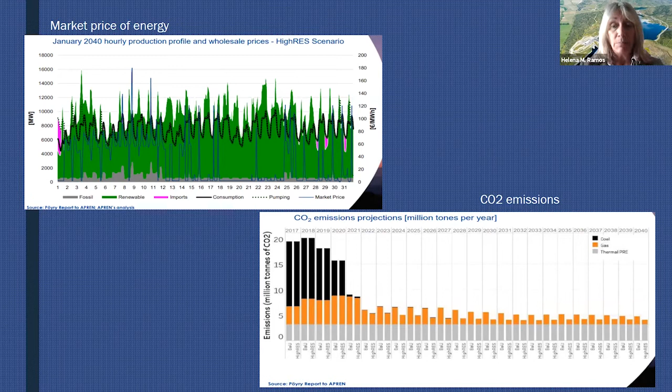Well, a significant effort is required to reduce carbon emissions generated by industrial processes and land use by 2050. Additionally, if the climate objective of the Paris Agreement was raised to restrict global temperature rise to 1.5 Celsius degrees, this would require significant additional emission reductions and a steeper decline in global emissions.

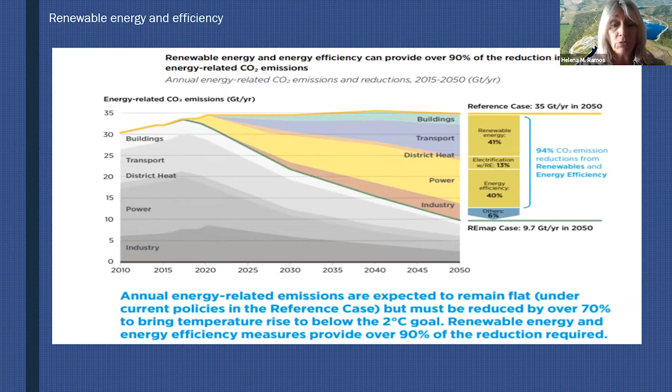Well, we can see the energy-related CO2 emissions here, a reduction of around 90% by renewables and energy efficiency that will be necessary by around 2050.

Well, the rising importance of solar and wind energy in the power sector is very interesting. To deliver the energy transition, the almost complete decarbonization of the electricity sector by 2050 is required. How can we do this? By using renewables, increasing energy efficiency, and making power systems more flexible.

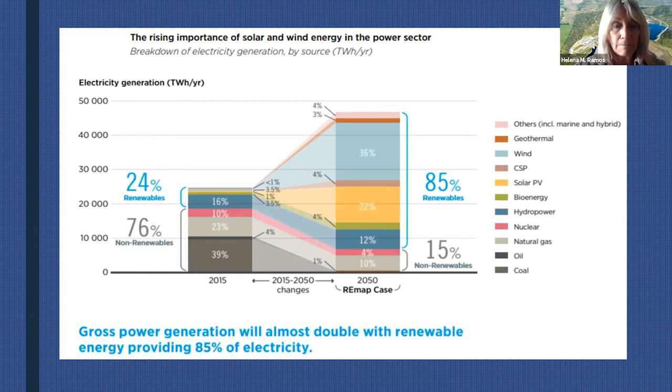Well, there is a relationship between energy consumption and production from renewable sources. The relationship between the energy source and the selling price of electricity also exists in terms of costs. This means the greater the representativeness of renewable energy sources, the lower the market price is.

We can observe these green bars, which mean renewable energy production. When we have more production from renewables, the market price decreases and decays like this.

Well, so a very interesting solution appears based on pumped hydro systems. So the challenge is focused on using renewable sources, such as wind and solar power, with their variability, intermittency, unpredictability, and dependence on the weather, together with solutions supported by hydropower.

You can see in this figure pump storage energy solutions, okay, in which the storage can be 8 hours or more, depending on the water volume that we can retain in these two reservoirs. And we can integrate, we can also absorb these intermittent energies like solar and wind energy.

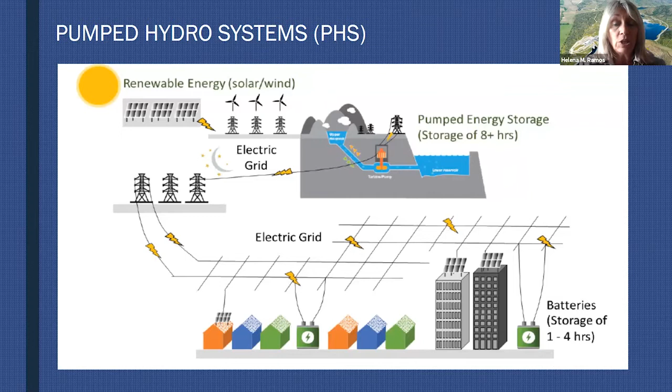Compare this with the other types of batteries that you can see at the bottom of this figure, in which the storage is only about 1 to 4 hours.

Well, in many European countries, the phase out of nuclear and coal generation has started with the transition to new renewable sources, comprising mainly solar and wind for electricity generation. However, they are variable energy sources and difficult to align with the demand. So hydropower has already an important role today and will become even more important in the next decades, since hydropower can be a catalyst for the energy transition.

Then, hydropower will be one of the most crucial pillars of the future electric systems, required for the full integration of renewables and the grid regulation, thanks to its high quality of flexibility and storage. Hydropower already supports the integration of wind and solar energy. Nowadays, we can see different systems like this into the supply grid through flexibility in generation, as well as its

potential for storage capacity. This service will be in much greater demand to achieve the energy transition in Europe and worldwide. This will require a more flexible, efficient, environmentally and socially acceptable approach to the increasing hydropower production to complement wind and solar energy production. So the ambitious plan for the energy transition in Europe seeks to achieve a low carbon climate resilient future safely and cost effectively, serving as a worldwide example.

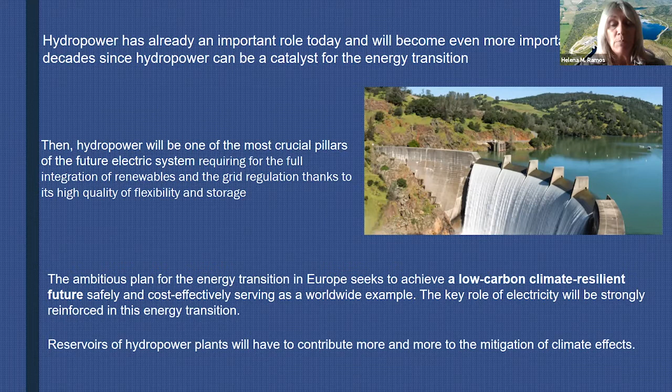The key role of electricity will be strongly reinforced in this energy transition. For example, reservoirs of hydropower plants will have to contribute more and more to the mitigation also of the climate effects as a natural battery without waste, without so many environmental impacts compared with the other types of batteries. Europe has long-term experience with hydropower design, construction, operation, and maintenance. The know-how of the European industry, comprising manufacturing, engineering, and consulting, is strongly recognized worldwide.

Hydropower is the most preferable source of energy, or at least a powerful and efficient vector for global decarbonization. Hydropower is a climate-friendly technology, with the lowest release of CO2 and mitigating with water storage the impact of global warming and climate change. Hydropower is well suited to support the power network with flexibility and storage. It increases new renewable energy penetration, as I mentioned before, with a potential role in energy transition and will result in opportunities for new developments, especially for small hydropower, medium, and up to the large ones.

Hydropower increases the storage capacity both in short and long terms. The investment in hydropower will be considered as a safe value in the long term. Well, the International Energy Agency recognizes the critical role of renewable and flexible hydropower in helping countries to meet their climate and sustainable development goals.

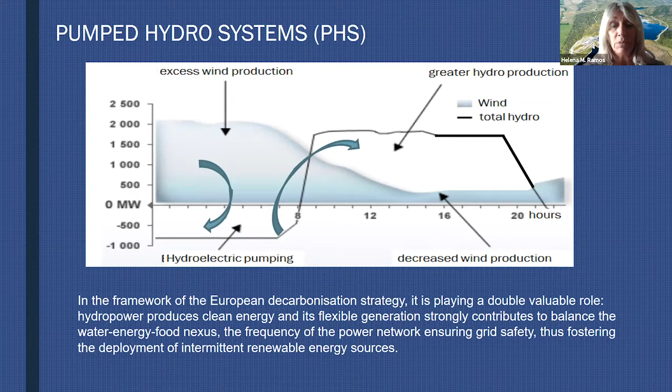So it is possible to guarantee we can uniform this load chart, power supply to the grid with several advantages. In the framework of the European decarbonization strategy, it is playing a double valuable role. Hydropower produces clean energy, and its flexible generation strongly contributes to balance the water, energy, and food nexus, the frequency of the power network ensuring grid safety, thus fostering the deployment of intermittent renewable energy sources.

Well, here, looking at the renewable energy technologies, they offer opportunities to address trade-offs and leverage synergies between sectors to enhance the water and energy nexus. However, connecting renewable power plants directly to the grid can cause dynamic controlling problems if the electricity network is not prepared for handling such variations due to the intermittency of renewable sources availability. It can cause some problems, but there is a solution for this.

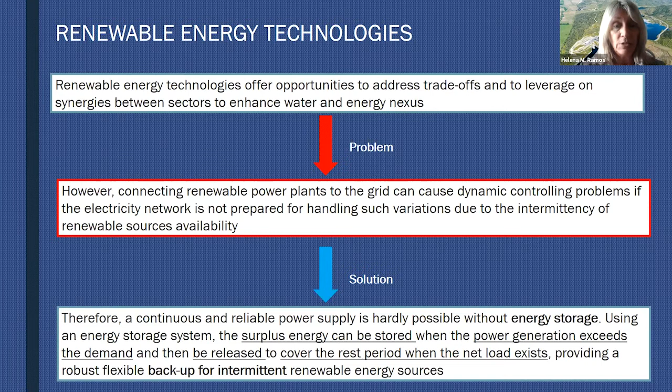A continuous and reliable power supply is hardly possible without energy storage. Using an energy storage system, the surplus energy can be stored when the power generation exceeds the demand, and then released to cover the rest period when the net load exists, providing a robust, flexible backup for intermittent renewable energy sources. And we can get a solution using a pumped hydropower storage, energy storage solution.

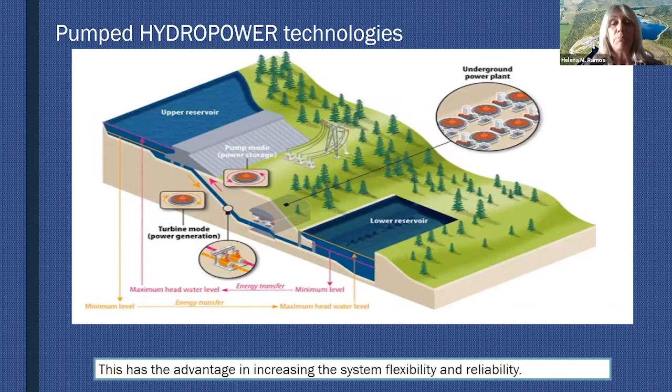Here we can see there is an advantage in increasing the system flexibility and reliability, decreasing the variability of renewable sources, since the variable power output can be leveled out due to a complementary nature between renewable sources through their integration in the hydropower by a pumped storage solution in a circular economy of water source. We can use the same volume of water between a lower and an upper reservoir as presented in this scheme, and using this same water, we are not wasting water. We can apply here the circular economy too.

Portugal increased in pump storage hydropower systems from 5 gigawatt to 7 gigawatt by 2020. Other examples of upgrade projects, for example, Alqueva 2, Bemposta 2, and Venda Nova 3, created this type of solutions based on the pump storage solutions. Portugal and Norway lead in Europe as the countries that invest more in hydropower and solutions with pump storage.

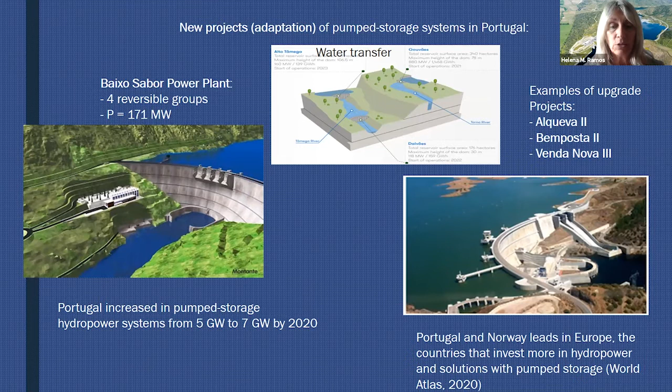And it is possible to make use of the connection to the already installed electrical network with higher efficiency, because water serves as a cooling system for the photovoltaic panels, increasing their total efficiency. There is more sunlight when there is less rain, and vice versa, in an excellent complementarity, as we can apply also for wind.

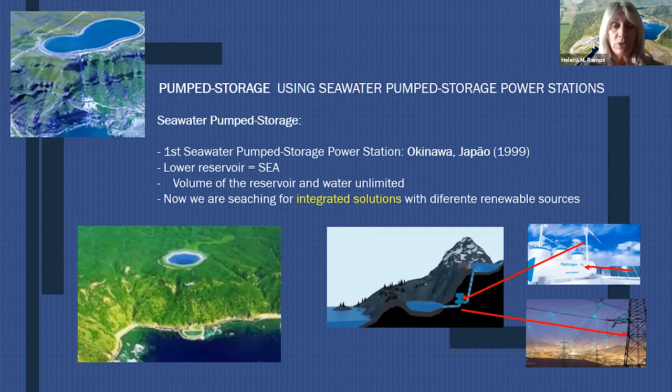Well, renewable energies are a subject of particular relevance in developed and developing countries. How to store these energies? Well, we need a good and competitive option to store energy generated by intermittent sources. Without storage, the energy produced, if it is not used, is wasted.

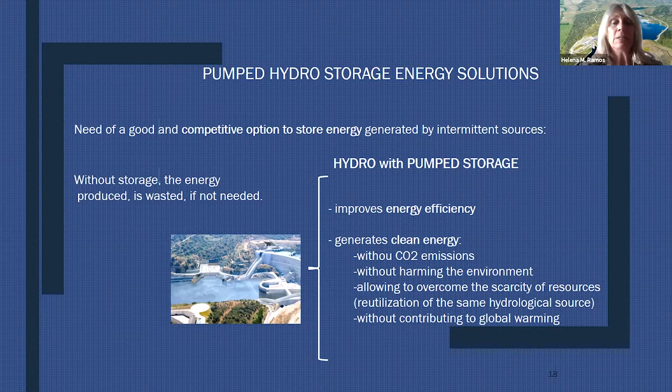Using hydro complemented with pump storage can improve the energy efficiency of the whole system and can generate clean energy without significant CO2 emissions, of course, without harming the environment, allowing to overcome the scarcity of resources with the reutilization of the same hydrologic source, this is water, without contributing to global warming.

Let's see a real case study. This is a case study developed in Madeira Island. This is one island belonging to Portugal. This is the multi-purpose Socorridos system. Initially, it was only a hydropower solution. Initial configuration based only on hydropower.

You can see we have here the power station equipped with Pelton turbines, and we have long hydro tunnels and canals allowing the transfer of water collected from the higher altitude and more pluvious northern sides of the island to the southern side of the island.

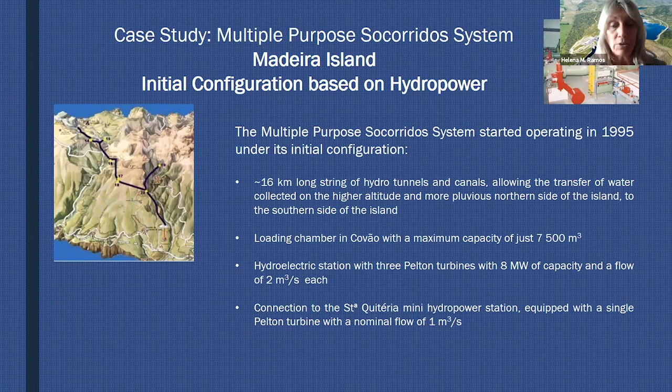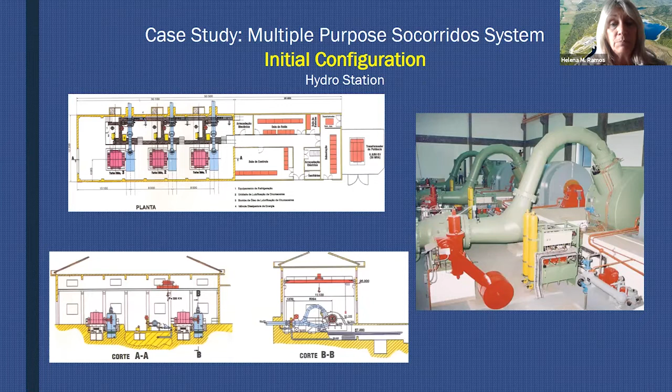We have a loading chamber in Covão in the middle, okay, of the conveyance system with a maximum capacity of 7,500 cubic meters. We have a hydropower station with 3 Pelton turbines, and we have another one in the middle of our hydraulic circuit. This is firstly a simple hydropower solution. We can see some plan views of the hydropower station.

And the multi-purpose Socorridos hydropower system, because you use this water for irrigation, for drinking, and to produce energy in Madeira Island, started its operation under this initial configuration, allowing the transfer of water from one side to other sides, but only focused on hydropower.

But more recently, some improvements came, and this hydropower solution was transformed into a reversible system, with the addition of some long tunnels to create more water storage capacity, the renovation of other tunnels, and the installation of gates to regulate water flow, allowing the storage of around 55,000 cubic meters of water in galleries excavated in the ground.

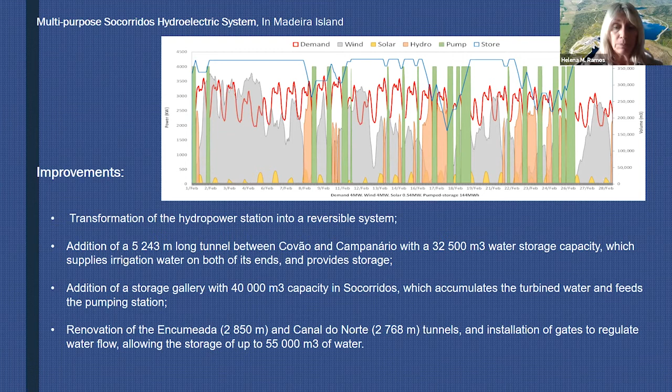With these changes, the project objectives were to guarantee more available power, to cut energy losses, to introduce additional wind and solar power, to reduce the use of fossil fuels, because in that place we previously had a thermal fuel power station. It was replaced by hydropower. So we want to reduce the use of fossil fuels, to reduce gas emissions, to improve the management of hydroelectric resources, to increase reliability of the water supply, to deliver 65% of irrigation water to distribution facilities, and to have treated water available for the population.

The introduction of other wind farms made possible by the Socorridos reversible system allowed for a reduction of 28 kilotons of CO2 emissions, 116 tons of sulfur dioxide, 478 tons of nitric oxide and 7 tons of particles, when the replacement by the hydropower solution happened.

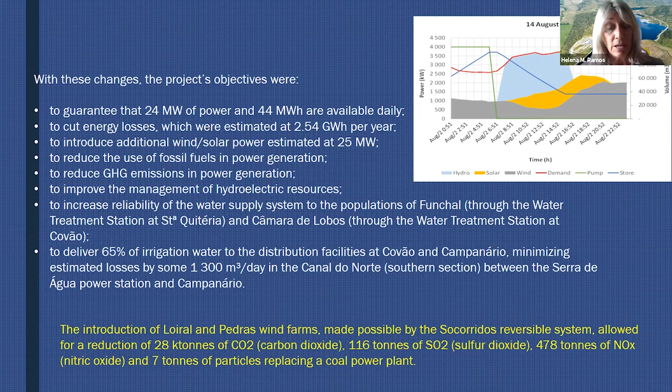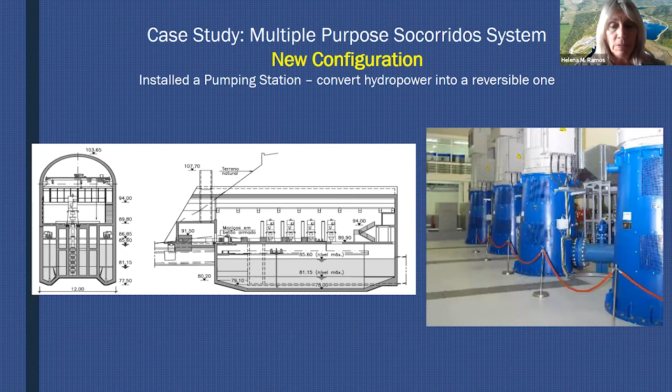Here we can see the new configuration. We can observe a pumping station composed of 4 pumps, 3 in operation and another as reserve equipment. And we can see here in this scheme what happened. We have some tunnels excavated in the ground on the top of the hill. We have a loading chamber to make the transition between the flow that comes from the tunnel to the penstock. This penstock feeds 2 power stations, one in the middle, the Santa Quitéria area, and another at the bottom, the Socorridos hydropower station. And the turbine flow comes to another gallery that can be pumped in other hours.

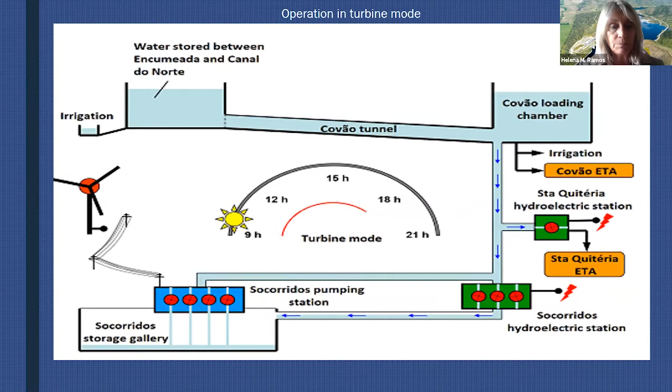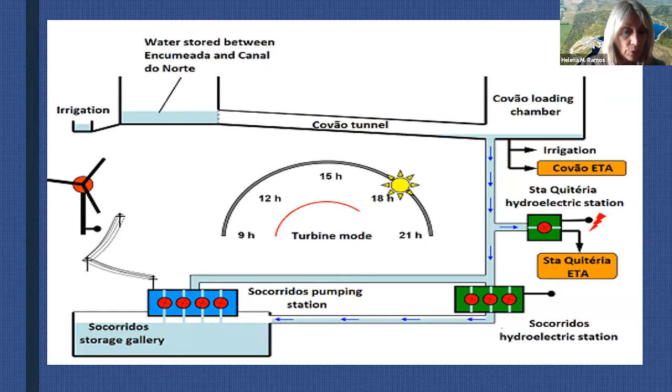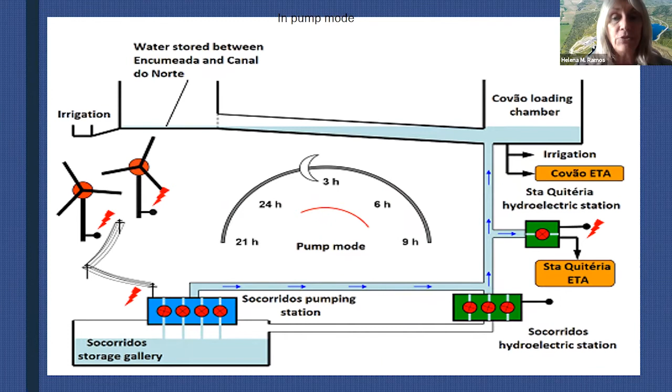During the day, we are turbining and creating renewable hydropower energy. During the day, we are emptying this tunnel and storing the water here in this storage gallery, so that during the night we can use the wind turbines to feed our pumps and collect the water again into the upper gallery. During the night, we are doing this. It is completely full and ready for another cycle of energy production.

Now we have the integration of wind and solar energy to supply what we need for these pumps. The surplus can, of course, be sold to the electric grid.

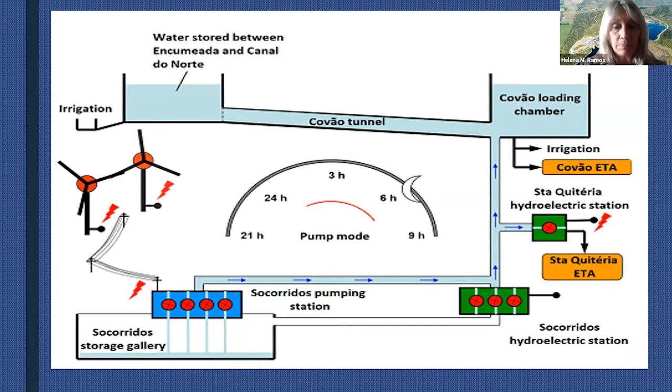Also, the Socorridos system affects the daily load diagram. Wind and solar photovoltaic penetration is maximized due to pumping in low demand hours, and thermal generation is replaced by hydro production in peak hours. I didn't put here when we had only a thermal fuel power plant, in brick color. But now, on the left, the load diagram is further smoothed out with renewable energy sources penetration of up to 30% of the electricity production share and the reduction of spinning reserves.

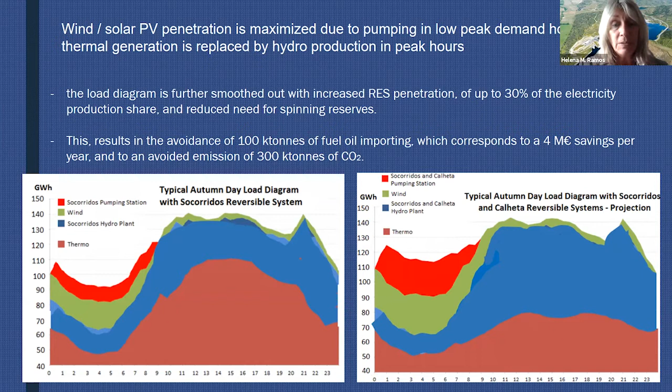This results in the avoidance of 100 kilotons of fuel oil imports, which corresponds to more or less 4 million euros savings per year, and an avoided emission of 300 kilotons of CO2. We can see the difference between the left and the right picture when we increase the wind and pump storage solutions. The pump storage is in red, the wind is in green, the hydropower plants are in blue, and the thermal contribution is almost disappearing.

Well, I will show you a small movie. This is about the pumped hydro storage system, a type of energy storage that can be implemented successfully in large, medium or small schemes, quite flexible, grid connected or in isolated systems, showing a positive outcome in terms of increased wind and solar energy absorption, while maintaining the economic feasibility of the investment. The introduction of pumped hydro storage in highlands, namely the Socorridos system in Madeira as an example, shows that this type of energy storage contributes positively to increased wind and solar penetration and also hydrogen production.

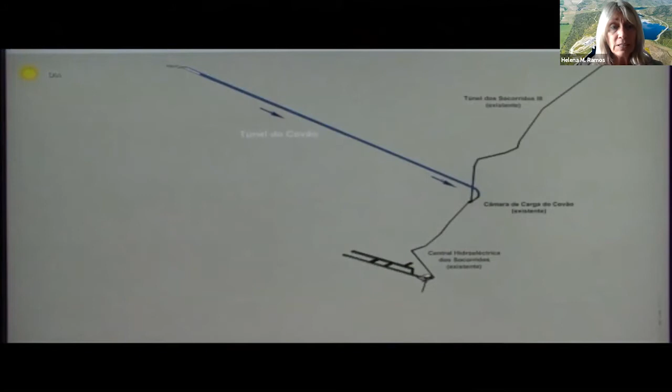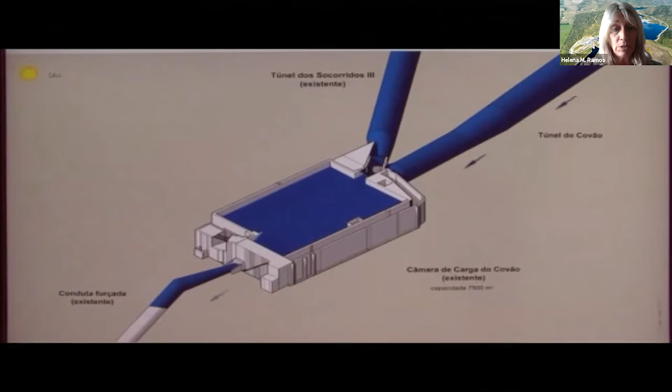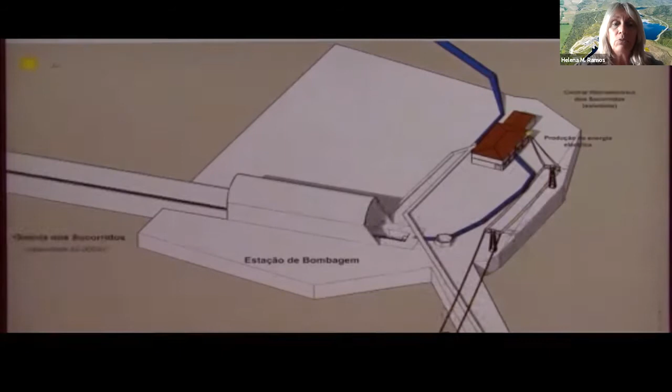And we can see that during the day hours, rush hours, we are turbining, we are producing energy. This is the load chamber in the middle of the conveyance system to make the transition between the tunnel and the penstock. The water that comes from the penstock passes through the turbines and is collected again in this gallery, the gallery of Socorridos, in this pumping station.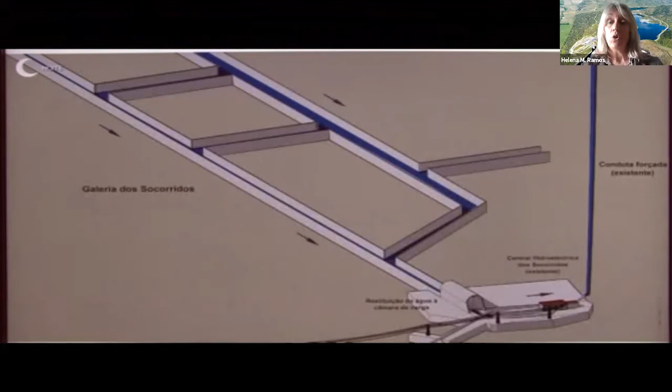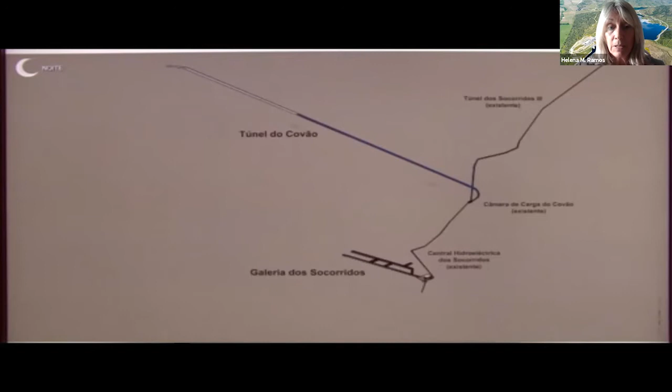During the night, as we can see on the top, a moon, during the night we can pump using the lower tariffs of energy or using other sources like wind, for example. We can pump again and fill again all the tunnel of Covão. And of course, this is ready for another cycle. And another day, we can repeat this.

We can see some views of Madeira Island with this penstock. And of course, this transformation into a reversible power station maximizes the hydropower production and energy efficiency, allows overcoming the limitation imposed by the water availability along the whole year, and allows a greater penetration or integration of other clean and renewable energies, such as wind or solar energies.

Here we can see the principle of the pumped hydro storage solution is to store energy by utilizing the potential energy of water. In periods of low demand and high availability of electrical energy from other renewable sources, the water will be pumped and climb. I can fill the upper reservoir and create potential energy. This water is like a big battery.

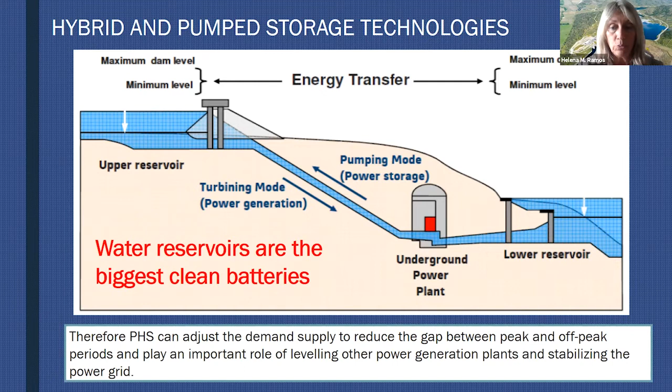On demand, the energy can be released, transformed into electric power within a short reaction time. I can inject this energy in only a few minutes, compared with thermal fuel power plants that need more hours to inject the energy into the grid. Some conclusions.

The pumping system can be supplied by intermittent renewable sources with a constant power production using some hydropower solutions, hydraulic turbines. In a hybrid solution, turbines and pumps can be used at the same time, depending on the intermittency, availability, and optimized variables, which include different renewable sources, the storage capacity, and the load demand. We need to analyze all of this using some optimization.

If you have only one pipe, of course, it requires different hours. When I'm pumping, I cannot turbine. But if you use two separate pipes, depending on the investment cost, of course, this can offer more operating flexibility. Different sources can be combined, considering different pump and turbine solutions, combining with others, for example, hydrogen, wind and solar. Hydrogen needs water, and we have water storage there.

The surplus energy from renewables produced at times of low demand can be used to store water as a big clean battery and have it ready for release when the demand rises again, with more advantage and greater economic viability, also in terms of CO2 emissions or waste released. We don't produce waste, solid waste, with this water battery. A hybrid solution is less expensive considering the power installed, with suitable initial capital costs.

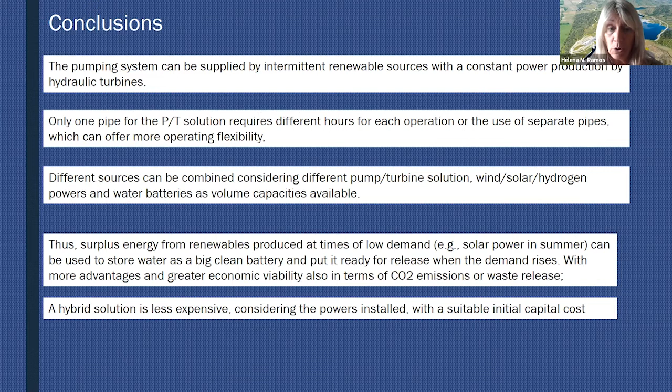Additionally, it can be concluded that replacing fossil fuels by renewable energy requires, of course, distributing installations such as wind and solar turbines widely, using a range of different intermittent energy sources, especially those that are partially complementary. For example, sunny weather often means light winds and vice versa, matching with suitable management of energy sources in periods of high demand.

And there is clear evidence on how all these modern integrated techniques for complementarity between renewable sources can significantly reduce electricity tariffs and increase the reliability and flexibility of the energy supply as main targets of a hybrid energy solution.

The commitment to net zero emissions, we heard some years ago a summit about this, and the commitment to net zero emissions targets has dramatically increased over the last year. More than 120 countries have now committed to net zero targets of CO2 emissions, preventing and controlling the associated climate change problems. And that's all.